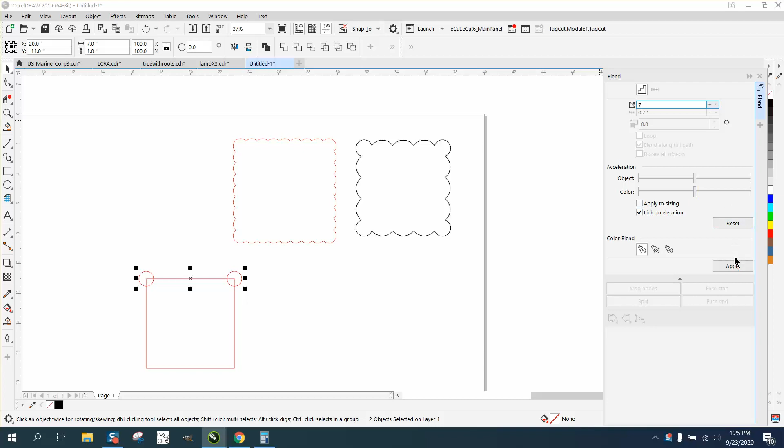Now, to make this work, the best way is to select it all again, go up to Object and break the blend apart. Go select it all again, go up to Object and ungroup it all. I've got my nudge factor set on 6 inches, so let's Control D and make a duplicate and move that down. So now it's at 6 inches. I'm gonna hit the plus sign this time so the duplicate won't go off the page. I'm gonna rotate this one 90 degrees.

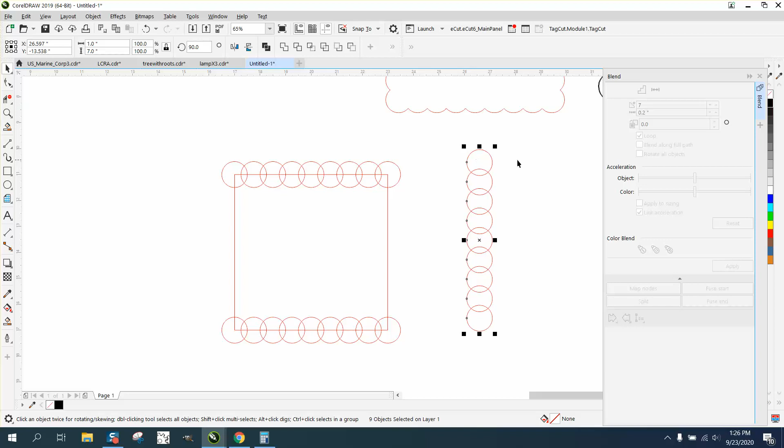I am going to grab it all, and because I'm working in the center of the page, I'm going to have it snap to it. Now, because I've got them all ungrouped, I can delete that other circle, which is a duplicate. Now I'm going to take just these 5, or whatever it is, and hit the plus sign, which is the same thing. Hold down the control button until it, okay, I missed that one circle. Let's back up here. So we need to delete, and if you ever don't know if it's deleted, you can always hit it.

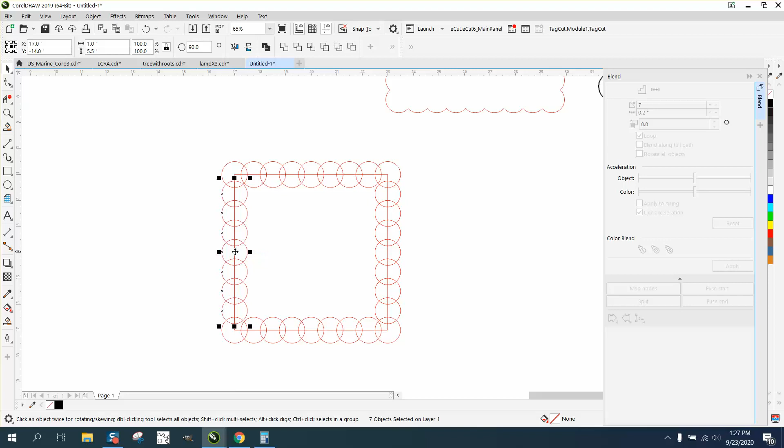Now let's grab all these, Control D this time to make a duplicate, same thing. You don't really have to hold down the control button, but it might help you to get it in the midpoint. Now I'm gonna take away our rectangle, and I'm gonna select all these, and I'm gonna weld. Now to get rid of that, we could do this. We could hit P, put it in the center of the page.

And if you like the circles on the inside, keep them; if you don't, just take the Smart Fill tool and take that away. And then you've got just a frame, or you could have a border around the frame, and you can make this frame any size you want. So that's how I do it.

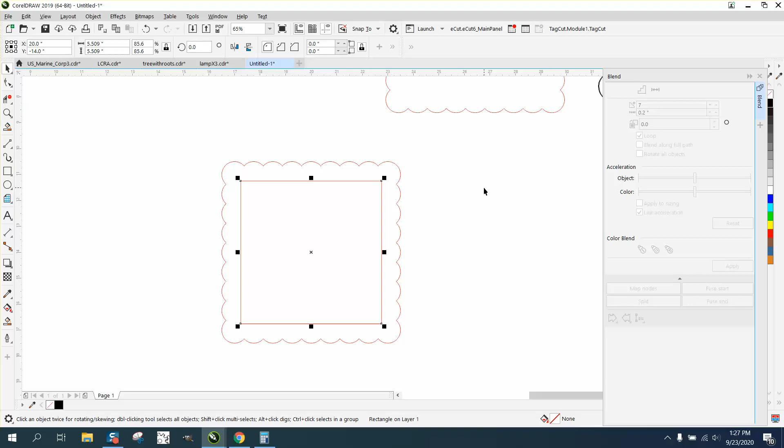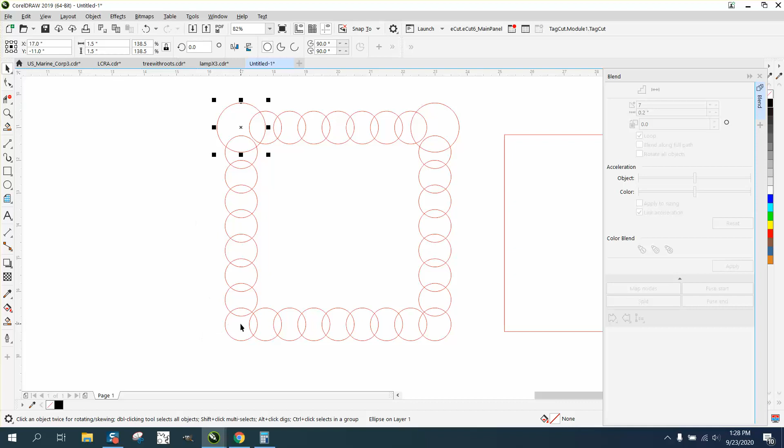Now, if you wanted to do it more like the picture, before we welded it together, you could stretch these out, or let's try making this like 1.5. It'll grow from the inside out. There might even be an easier way to do this. I could probably select them. I don't think you could select them all. There is a macro that could do that. Now let's weld them, see what the difference is.

You know, you get a totally different look. You can just play around with that, and if he really likes this one, these are just stretched out circles. And so you made bigger circles and maybe even moved them in more. But that's how I would do it.